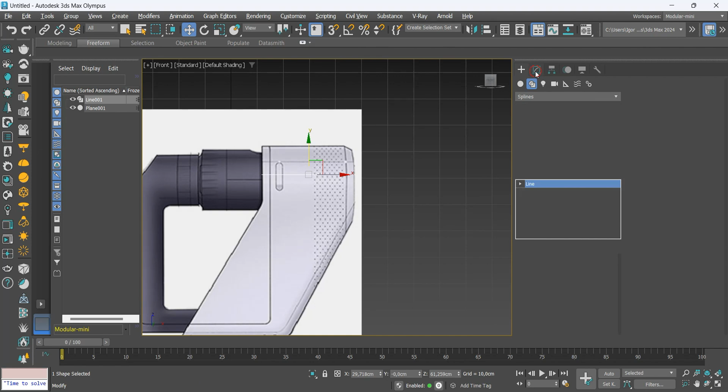First, we create a line. We will adjust the thickness to match the curved shape of the top of the reference. We convert it to editable poly and delete half of it.

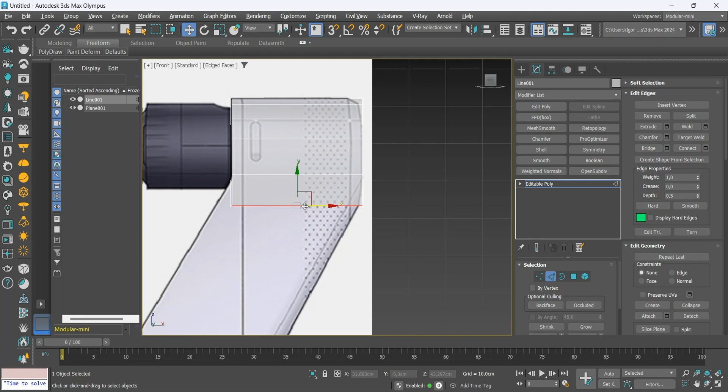Let's select the edges and adjust according to the reference. Holding Shift, we will extrude the shape, creating the base of the model.

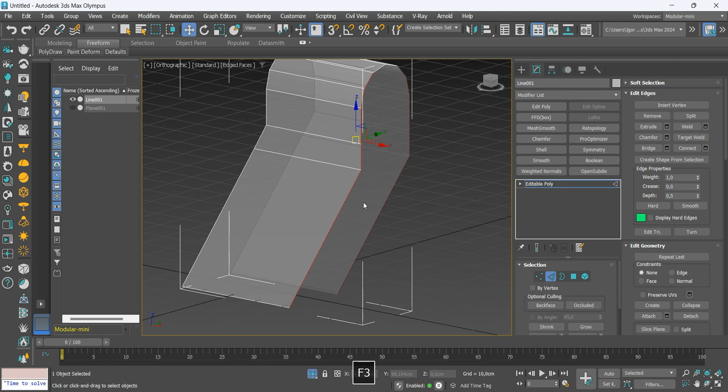We'll select all the edges except the top two and apply a bridge to create the face. I'm going to do the same on the bottom and the other side of the model.

Let's insert a loop in the center and join it with the target weld.

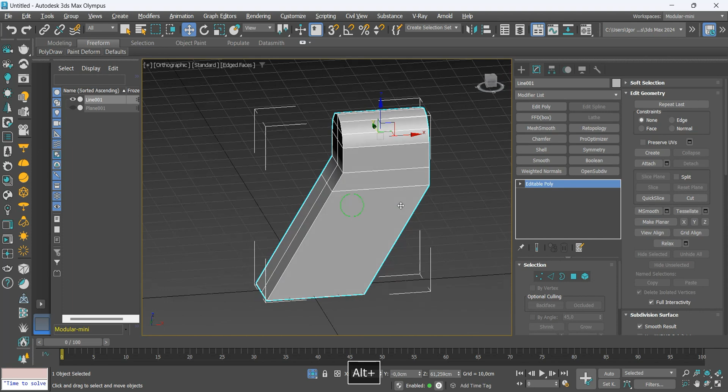We adjusted this edge. And now we create a chamfer on these lines.

Let's select all the edges to create a chamfer as in the reference, following this flow of the shape.

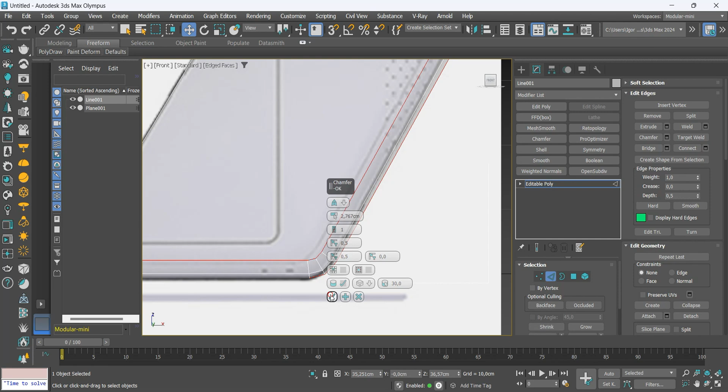We adjusted the position of some vertices.

Now, we use cuts to create these vertices, and with vertex connect, we will add an edge close to the edge to connect with the one we made above.

We went back to the cuts and completed the remaining points. Again, with vertex connect.

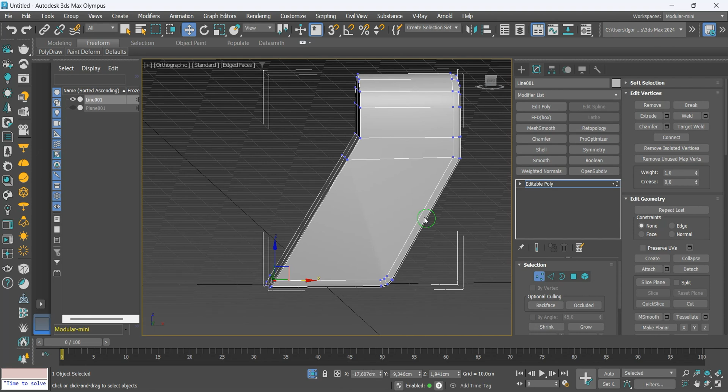Let's add a new loop at the top to connect with these points. With cuts, we create the loops for the side part.

Now, let's create the line that divides this model into two parts. I will align these vertices on the x-axis and align them with the top vertex, making sure everything is aligned correctly.

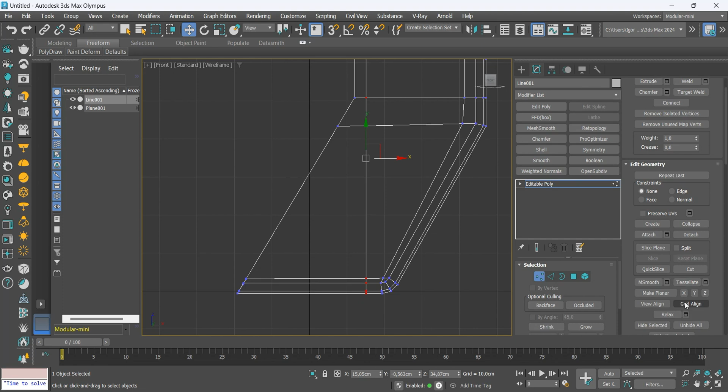Let's use the loop that we created as a line that divides the model at the bottom. Remember to adjust the other vertices close to where the cuts will be made, leaving your mesh more optimized.

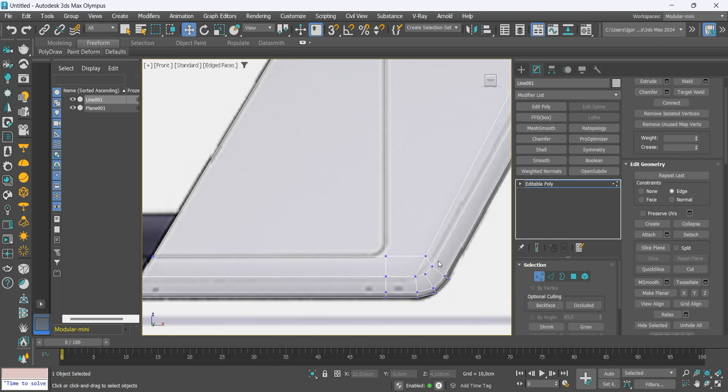Now, let's apply a symmetry to mirror the shape. We go to face mode and select the face that we are going to separate with detach.

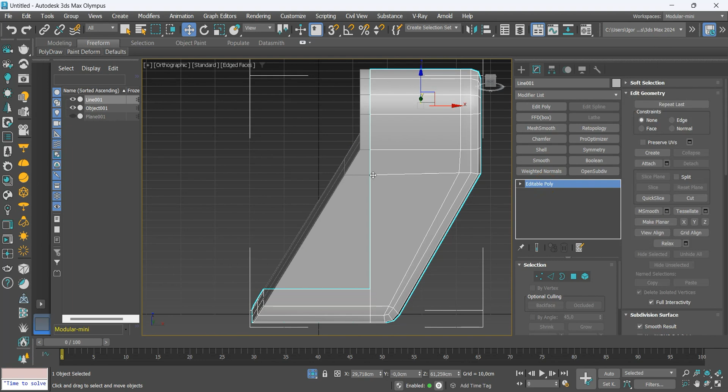Let's work on that front part first. Here, we will fill these holes.

Let's do as previously: we selected a loop of edges, minus the two at the top, and with the bridge we complete the shape. Here, I will insert a new loop in the center and join it with the target weld.

Again, we create the loops close to the edges with cuts, and with vertex connect we will insert a loop at the bottom and connect the points.

We need to do this so that the number of vertices is the same as the bottom.

Let's apply symmetry in Z. Now let's select all the edges except the sides, and we apply the bridge to close the hole.

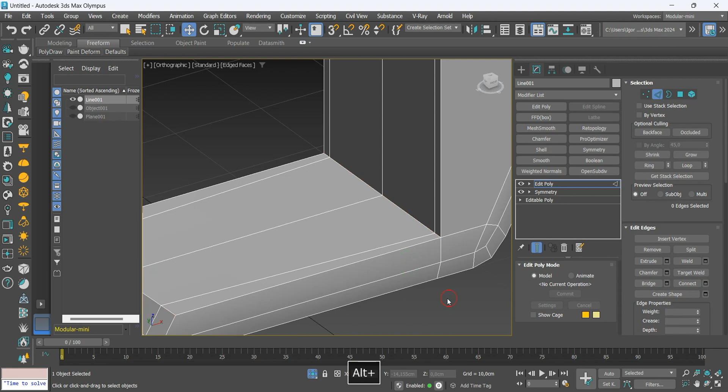On the edges, we will apply a chamfer following the reference.

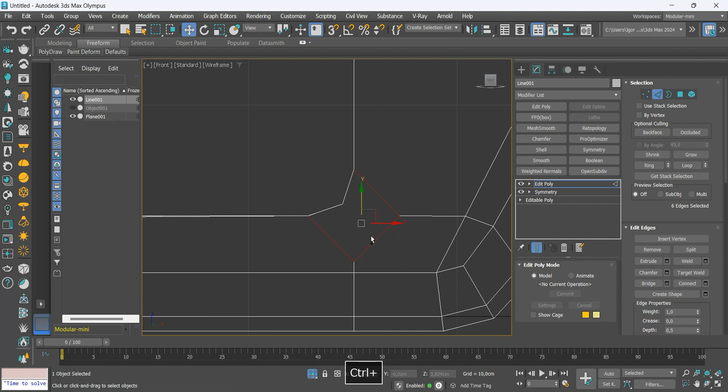Here, we will delete all the edges and connect the points again with the edge connect. My shortcut is Ctrl-Shift-E.

To apply it to the other side, we will copy the symmetry modifier and paste it at the top of our stack of modifiers.

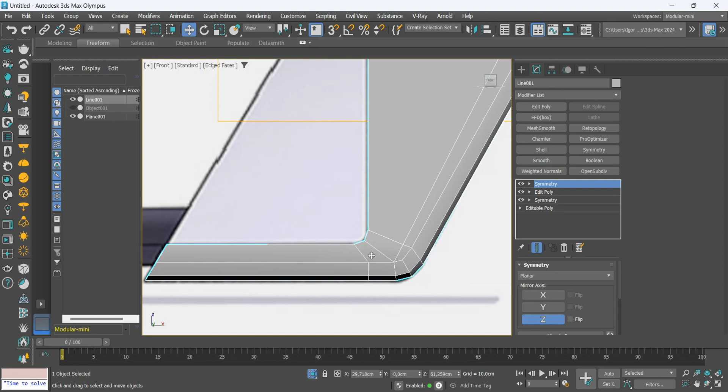We see that everything is working fine. Returning to our mesh, I will align these points on the y-axis and adjust the vertices using the edge constraint.

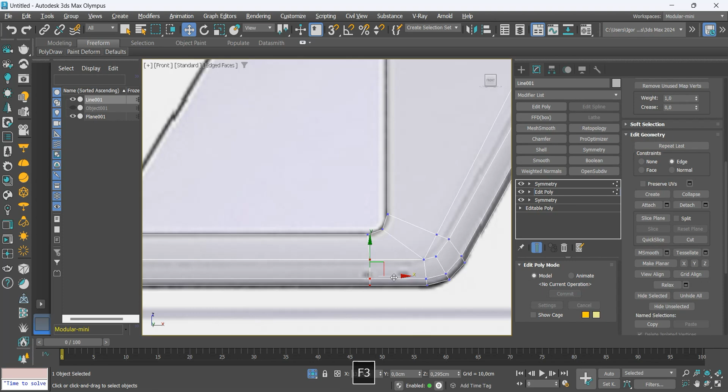Now, let's insert support loops with Alt-1 to hold the shape when applying the smoothing modifier. On this edge, we will also add a support loop.

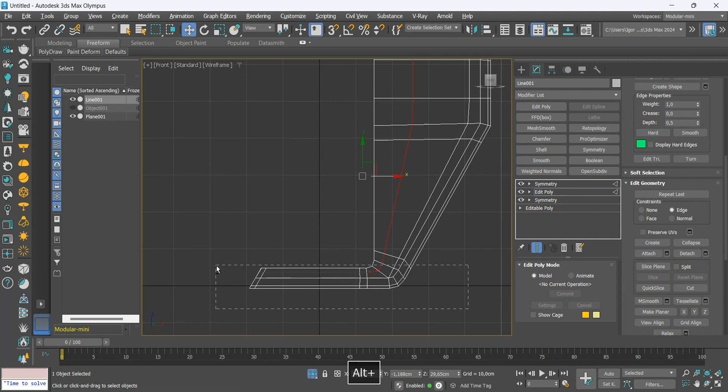See that it appears as if there was an error in the mesh, but when you hide the line, the error disappears. With this, we can adjust the edge so that it's closer to the corner of the model.

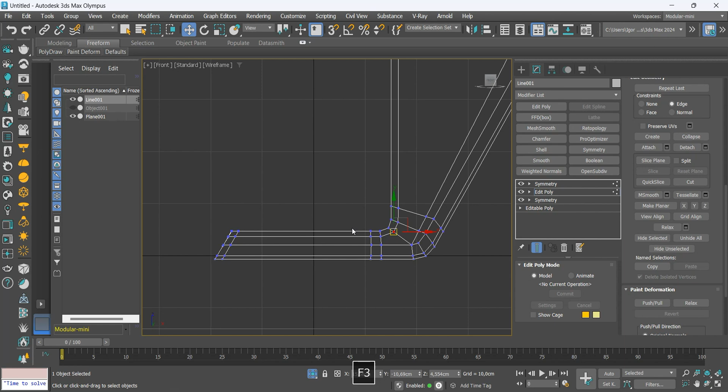Make the entire loop have a similar distance across the entire part of the model. This helps to make the mesh more uniform.

Let's add the smoothing modifier to see if everything is working. Once that is done, let's go to the back. The process here is very similar to what we did on the other part of the model.

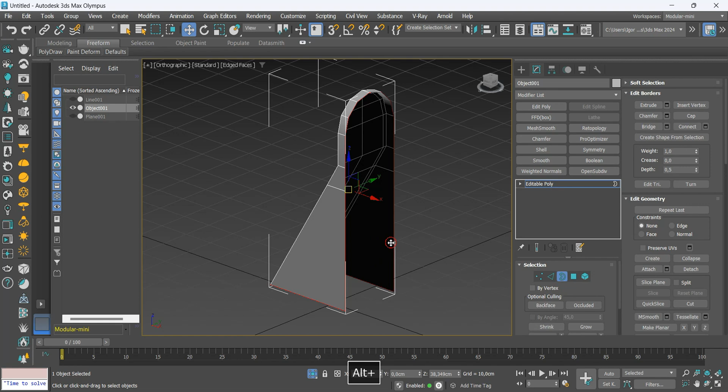Let's close the holes and create a new vertex contouring the cuts.

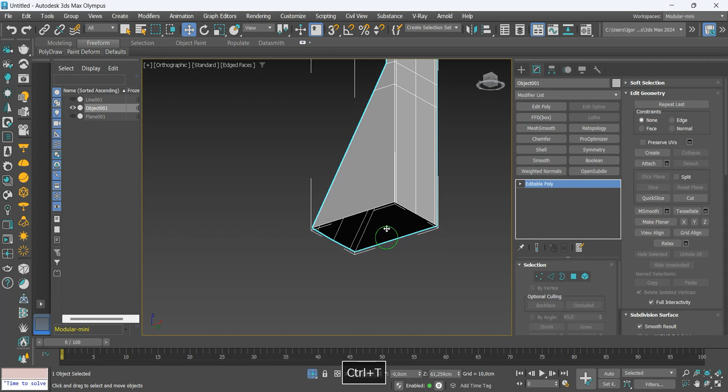Again, we use symmetry, and finally we close the bottom face with the bridge. Let's adjust the edges so that they are closer to the edge. Let's also remember to align these points with the Y-axis, and the ones at the tip on the X-axis.

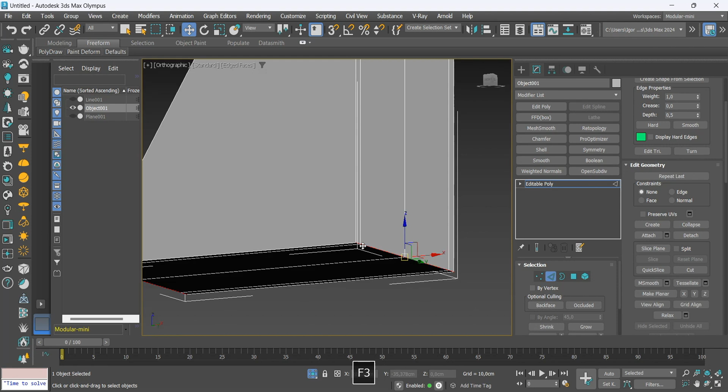On this edge, we must create a chamfer the same size as the first piece. For this, we return to the previous piece. I'm going to apply a chamfer and undo just to get the value that was used. Now we return to the second piece and apply a chamfer with the same value as the first.

Here we will add a loop and connect the points. We do the same at the top.

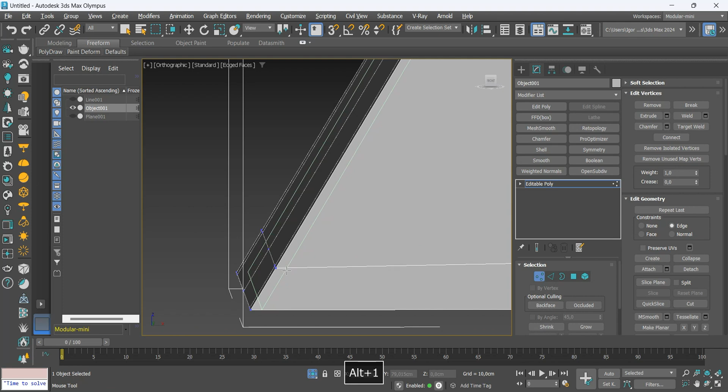Now let's add support loops to hold the shape. My shortcut is Alt-1.

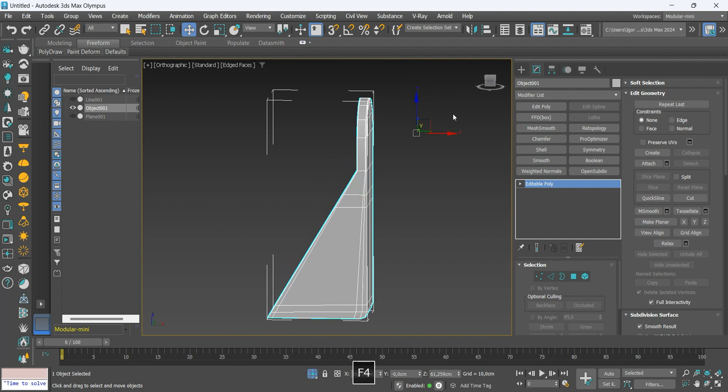On the edge, we will remove the loop and add it in the same direction as the loop on the first piece, so that the edges are uniform. We added symmetry. At the top, I'm going to move these edges away a little.

We apply the smoothing modifier.

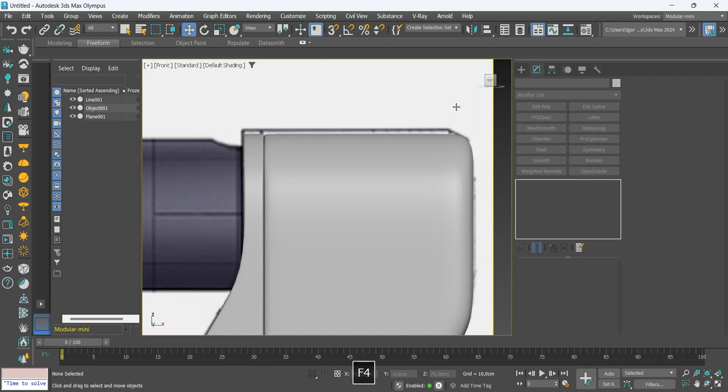At the top, we'll need to go up a little. As these pieces are already finished, I will remove the last modifier, convert it to editable poly, and join with attach. Now we return it with the modifier.

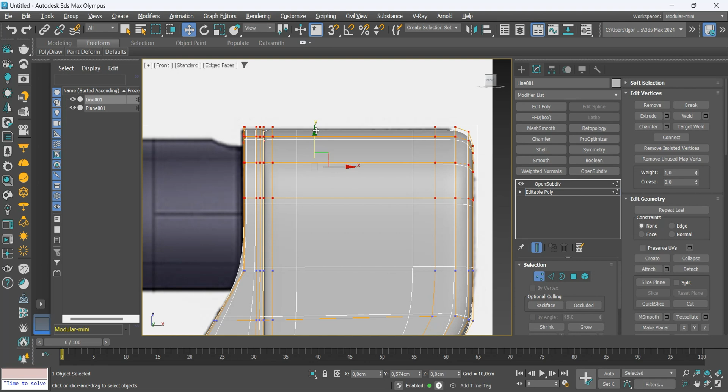Here I select the top part and enable the option to show vertices in this option. This way I can clip the vertices and visualize what the result will look like. At this point, we will lower these vertices.

Finally, this piece needs a support loop in this corner. Let's add one.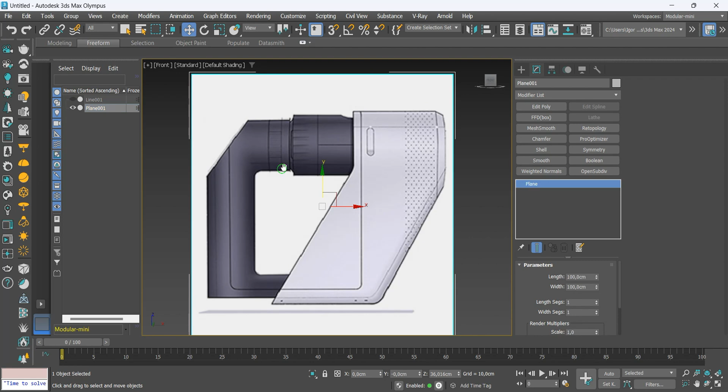For this piece, I use the line. Let's follow it in the central detail.

We adjusted its position and then its thickness.

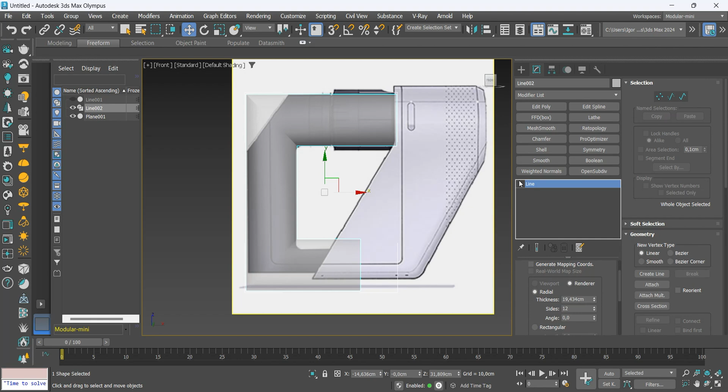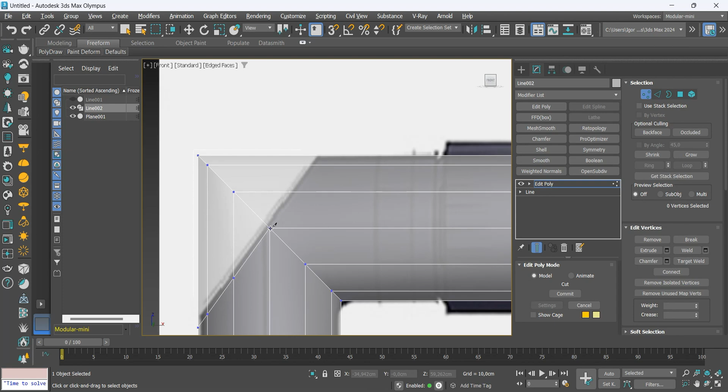Now let's apply a symmetry to the Z-axis.

We can delete these vertices and align the points on the Y-axis. We'll delete this upper part too. Now let's close this hole.

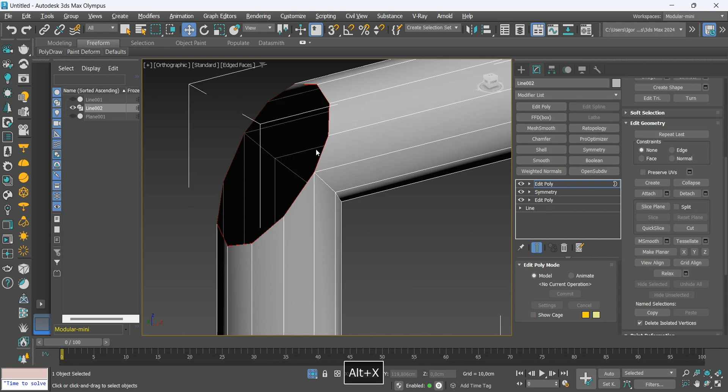Let's use bridge, as we did in the first piece. We add a central loop, and with target welds, we join the points.

We do the same on the bottom.

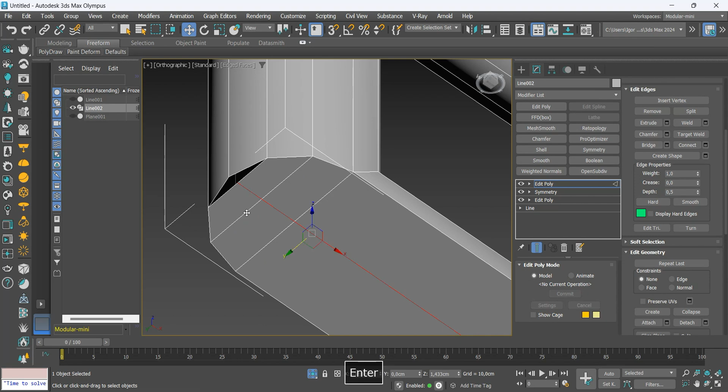For this hole, I will use the cap and fill the edges with the cuts.

At the top, I will delete these edges and extrude this face, creating a loop close to the edges.

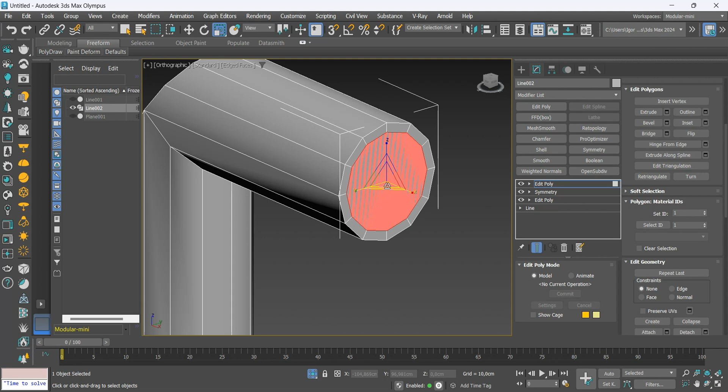Now I'm going to select some edges to apply a chamfer, softening the edges.

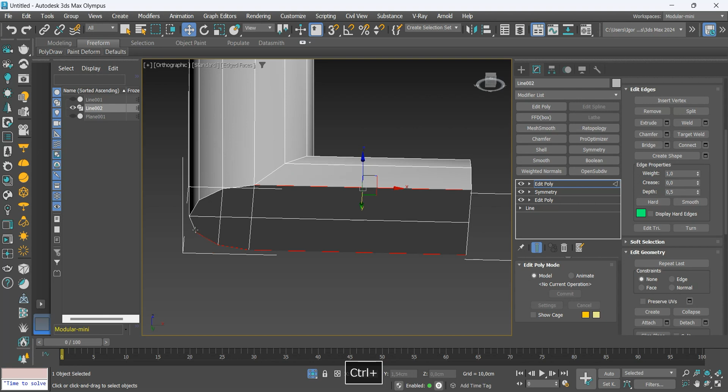For this corner, I will insert support loops, the same as at the top of the model.

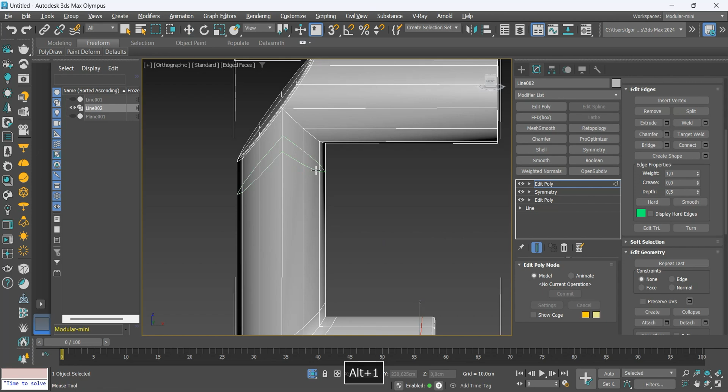Here we'll see their part is working correctly.

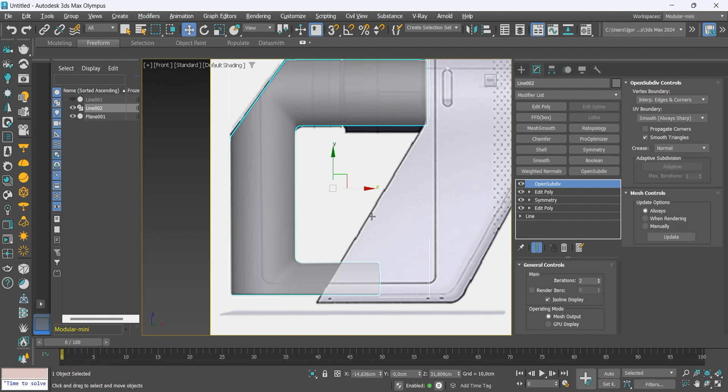I'm going to bring these loops a little closer to the edges.

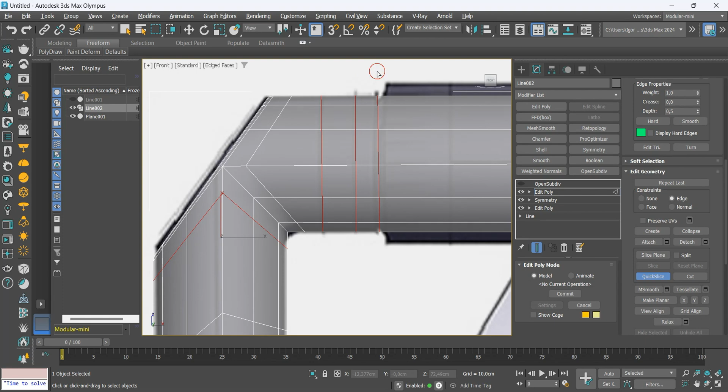Remember to align the loops on the X-axis.

In this last one, we will apply a chamfer so that there are 2 loops. Here I will insert a new loop.

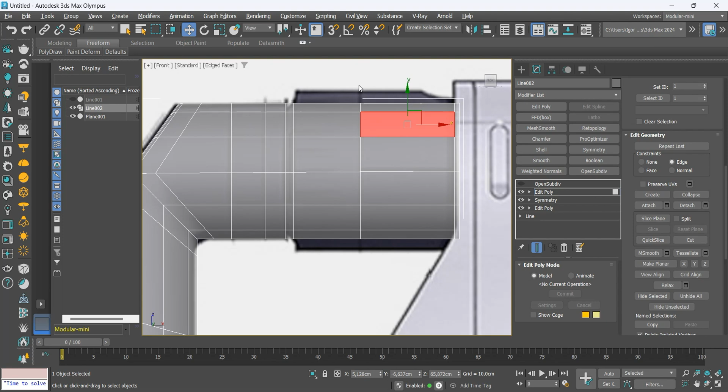And now in face mode, we will apply a bevel to this face in the local option.

I'm going to remove these loops and add some support loops to these edges.

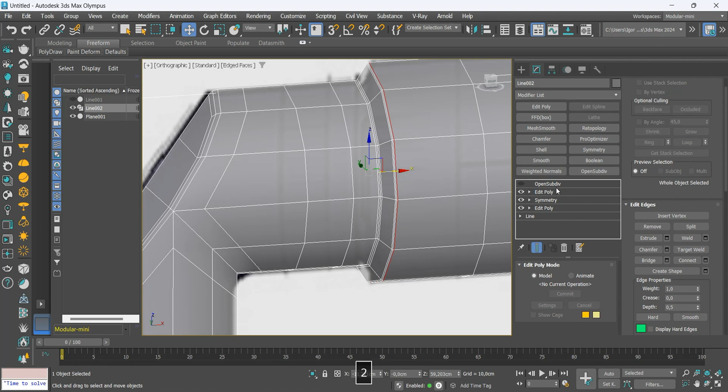Let's create some details on these edges. I'm going to raise the division levels to 1 and add the editable poly. Now let's adjust some edges and remove the ones that we don't need.

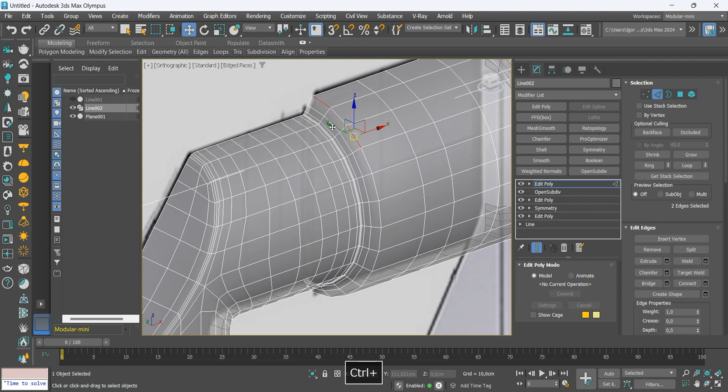Here, we will create a detail on these edges. For this, I will select just 2 and use the dots loop. It will select the entire loop by intervaling the selection.

We delete these edges. We will again use the dots loop to select these edges. Holding Shift, we will extrude these edges. Now we will scale the lines a little so that they are closer to the edges.

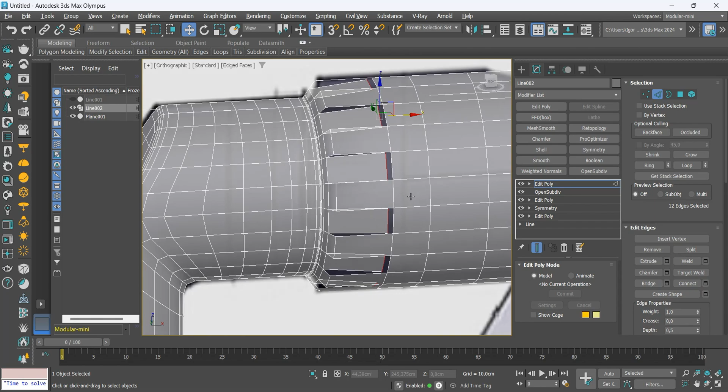Here, we need to use the bridge to close the space. I'm going to do it one by one since that bridge doesn't work with multiple edges at the same time.

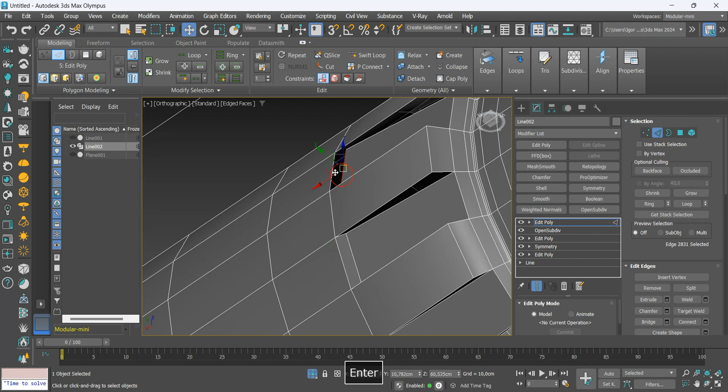Once this is done, we will close the side space using the cap. In border mode, select all with Ctrl and use the cap.

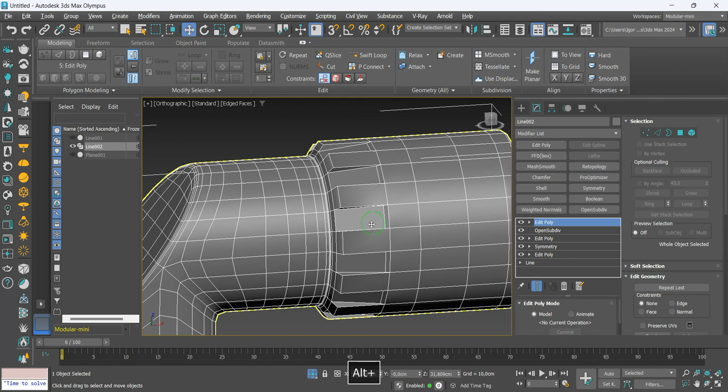I'm going to add the support loops in front and the smoothing modifier to see how it's working. I will add a loop to this part and we will see the result. The edge is very hard, and that is not what I'm looking for.

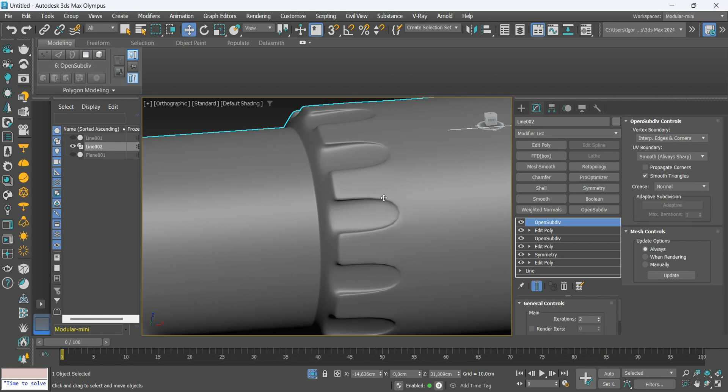I'm going to remove this loop and insert a new one now in the middle of the details. I believe this is more appropriate here. Feel free to leave this border however you like best. So I'm satisfied.

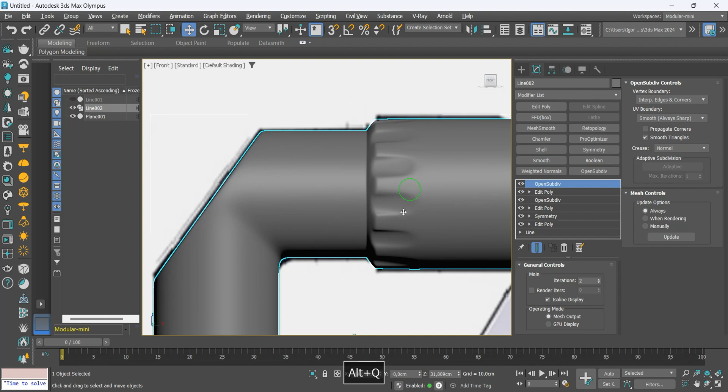Returning to the piece, we will remove this loop and create this cut that we have in the reference. I will adjust this loop with the edge constraint.

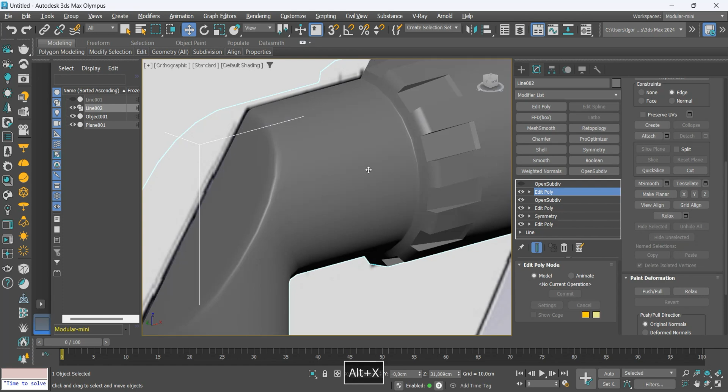Here, we will select this loop in face mode and use detach to separate the face in clone mode. Let's work on this face. I'm going to isolate, then the shortcut is the Alt key.

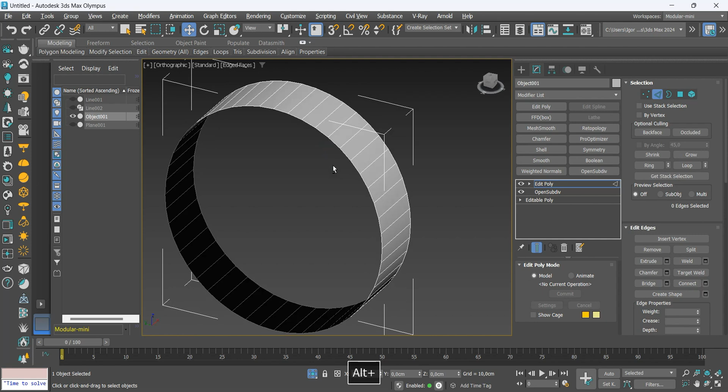I'm going to apply OpenSubdiv, and then Edit Poly, we are going to remove the center line. With Ctrl we select all the face. I'm going to deselect some at the top so that they don't have the details.

Let's apply a bevel in polygon mode. We adjust the size of the details and the space between them.

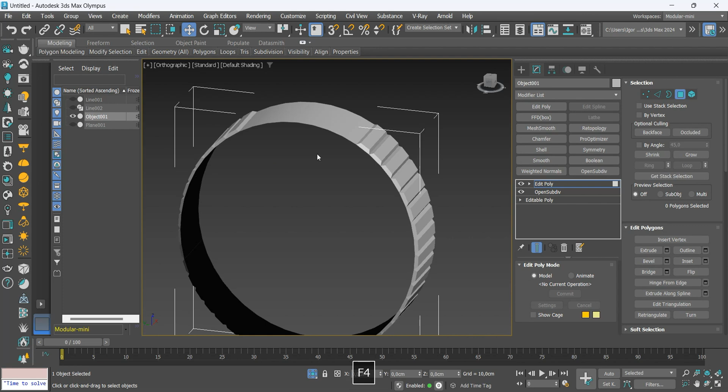In Edge mode, we will extrude the edges of the model by holding Shift. Right after that, I will delete this face and close the space with Bridge.

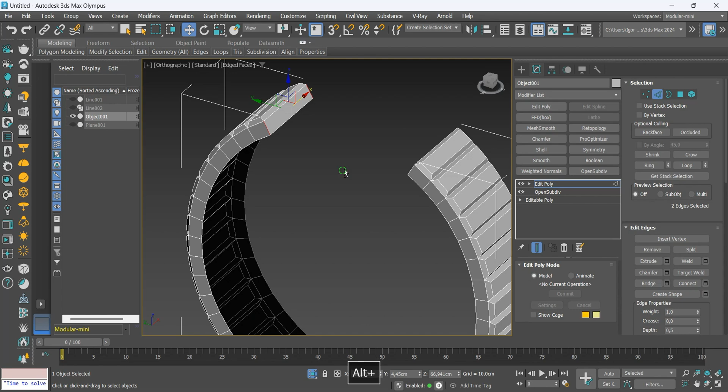Returning to the piece, we will now create the cuts for this piece. I will use a very small chamfer. And on the central lines, we use the extrude. We adjusted the values and insert some support loops on the edges.

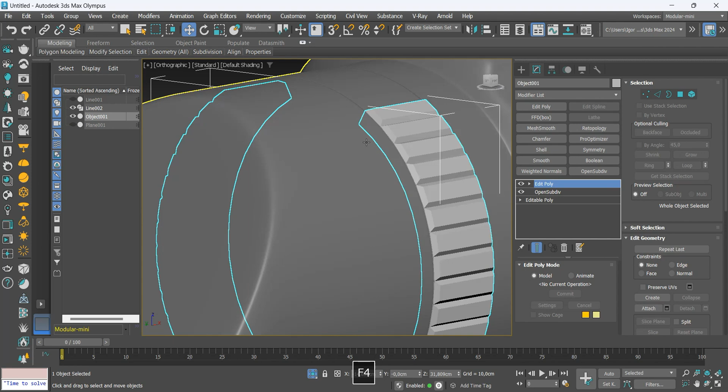I'm going to change the color of the detail to see how everything is looking. We see that it's correct and we move on.

Now let's create this detail on the front. I'm going to bring the line closer to the detail. In vertex mode, we are going to go down on that part.

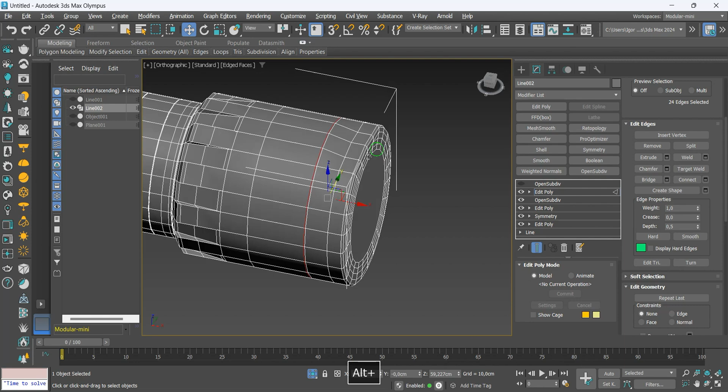Let's use cut to create this line. I'm going to remove this loop. And now with cuts, we are going to create an outline around the details.

With the edge constraint, we will bring this line closer to the other, and the same with the vertices. Let's adjust this in the center too. Let's do the same on the other side.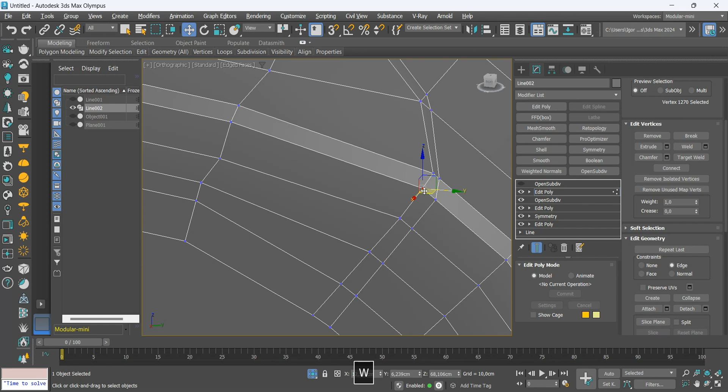With target welds, we will join the vertices.

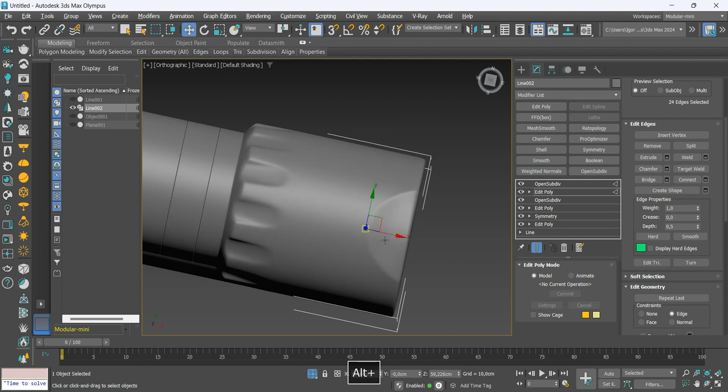Once that is done, we add the support loop again. Here, I will adjust the vertices so that it's closer to the reference.

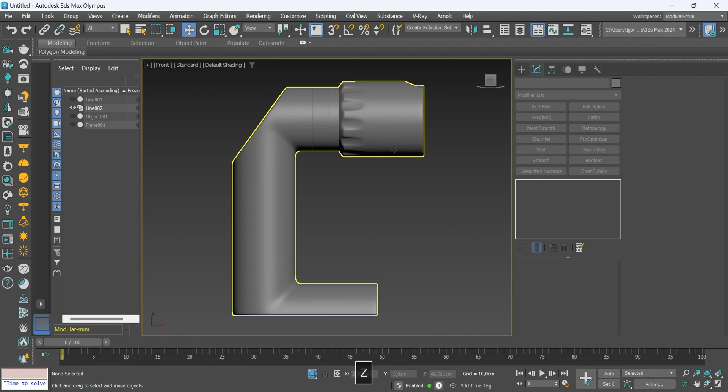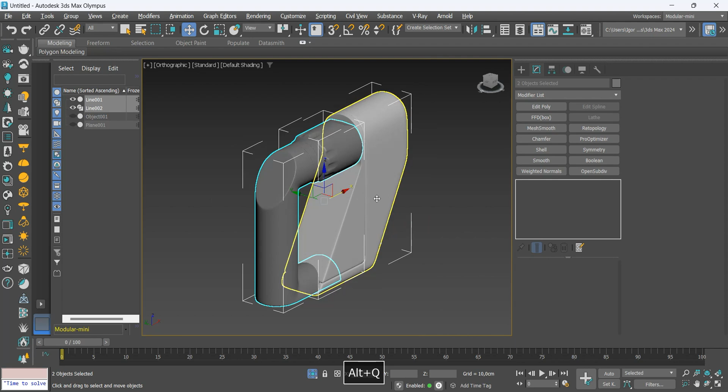Once this part is finished, we move on to the front piece. We'll see that it needs more thickness for the fit back. Let's use scale to adjust this.